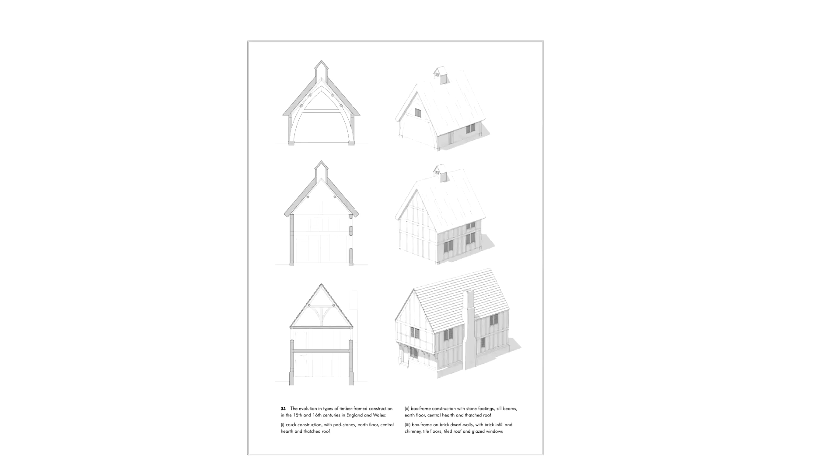And for that reason, in the vast majority of the cruck-framed houses that we have, the crucks sit on padstones. And there is virtually no archaeological evidence for earth-fast crucks because they've gone. What we do have are cases where the crucks have been scarfed and new feet put on them low down on padstones, and it is supposed that the padstones and the bottom of the crucks were pieced in. But that is the best I can say.

The first you see, I wanted it to be with earth-fast posts, and I received a criticism on the ground that there are actually no surviving examples of this. I thought, oh. So I put the padstones in.

But the main point is to show you an upgrading in the quality of timber-framed architecture from cruck framing, which is essentially a one-storied mode of construction with an earth floor and a central hearth, to a box frame, which, as you see, is raised on stone footings with a base plate and a roof plate, and again, an earth floor with a central hearth. So part of the house has to be open all the way to the roof.

And in the 16th century, the use of fired materials to upgrade box-framed construction, so that we have brick footings, a brick chimney stack. We no longer have a central hearth, so there can be a full first floor. We have clay tiles on the roof, and we have glass in the windows. And although the framing, the carpentry, is very largely the same, this is an enormous upgrading in the quality and the comfort of the house produced thereby.

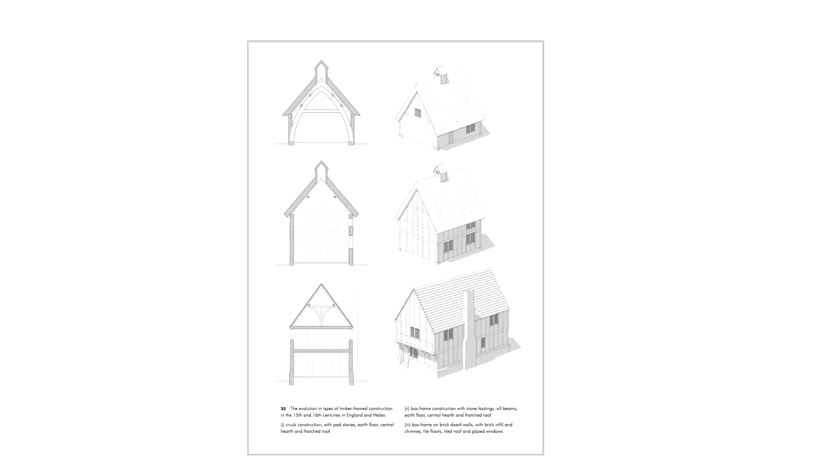Now, brick construction originated in this country only in the 13th century, and it was brought by Flemish craftspeople. And in the Netherlands, they had rather more sophisticated construction techniques because, of course, in a low-lying country, there's very little good building stone.

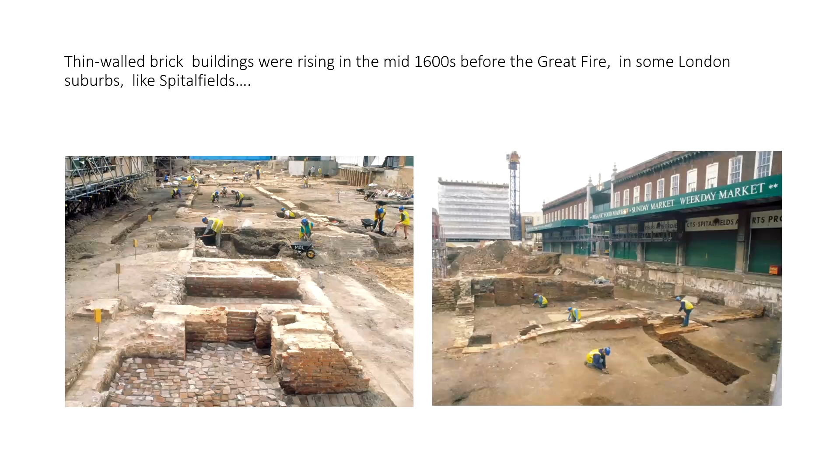And so London had established standards for thin-walled brick construction long before the Great Fire of London and the Building Acts which followed it. But the fact that the proclamations had to be reissued so many times, I think tells us a number of things. Most importantly, that it was quite difficult to get the Londoners to take much notice. And they paid attention when they wanted to. Of course, there are a number of factors at work here.

One is the greater resistance of brick to fire, and another was the rising cost of timber and the fact that most structural timber being used in London by this date was imported, was oak or increasingly deal from the Baltic. And as the cost of timber rose and the cost of brick went down, so framed building with brick infill declined in London and across the southeast in favour of thin-walled brick construction with concealed structural timber. And the London terrace house, you might say, is the result. And techniques for thin-walled brick urban houses and their structural carpentry were standardised well before 1700 through a mixture of craft practice in response, I think, to these official interventions.

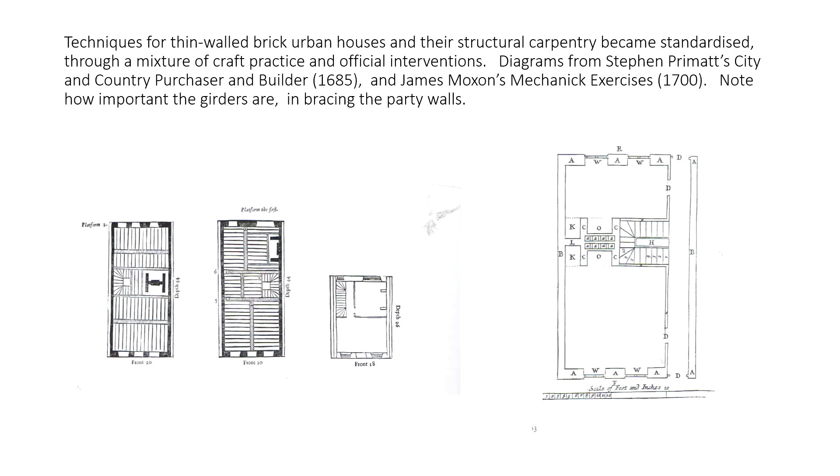And so the construction of urban terrace houses, the Barbon type of houses, was standardized, as we see in those books, well before 1700, and could be managed by a bricklayer or a carpenter. Typically it would be managed by a bricklayer or a carpenter as the lead contractor.

Quite a lot depended on whether craftsmen decided to make the stack internal to the house, but in the 18th century, it became increasingly common to locate the stacks on the party walls, and thus the entire internal structure of a Georgian terrace house is quite commonly made of timber, as many of you will know.

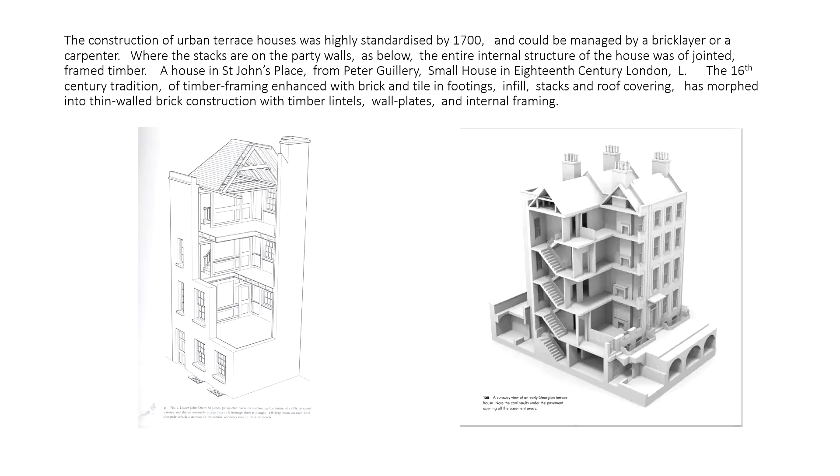So this is a house in St. John's Place from Peter Guillery's very wonderful book, The Small House in 18th Century London, which I owe a great deal to. And on the right is a cutaway of an 18th century terrace house made by Carlos Lemus for my book. Now, of course, framed construction didn't disappear, but it's hidden in one way or another.

And I think there'll be a whole range of answers to that question as the prestige and the fashionableness of classicism overwhelmed traditional framed construction and overwhelmed its distinctive but by then sadly old-fashioned aesthetic.

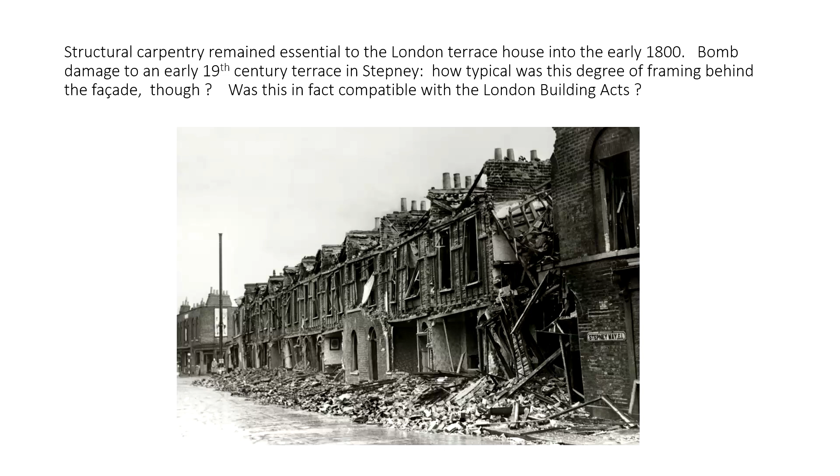So that's our first great theme, the evolution from traditional frame construction to thin wall brick construction with concealed structural timber, in which the carpenters are still right there at the heart of the building process, but their work is covered up by the brick.

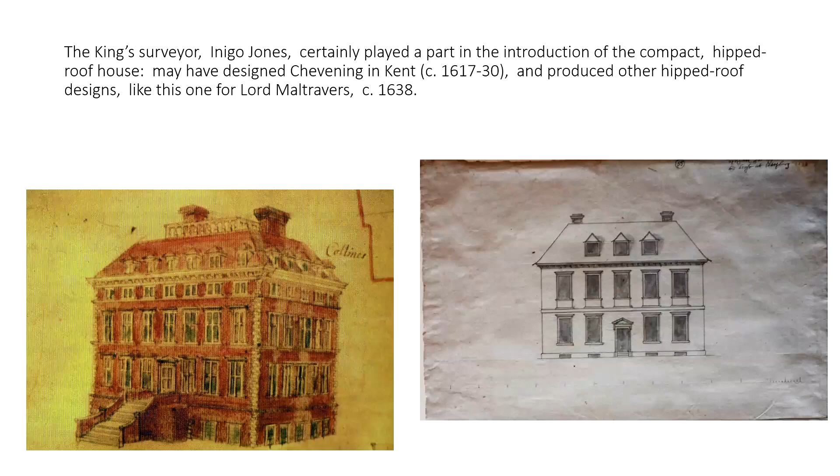And the last great decade for gable design, in particular shaped gables, was as late as the 1630s, as at Kew Palace and the very wonderful Broome Park in Kent. But thereafter, the tradition fell away very swiftly in the southeast and Midlands counties. I think the swiftness is slightly increased by the drop in the volume of building caused by the Civil War in the 1640s. So the gable and a variety in window design is still in sort of full flood in the 1630s. The Civil War kills a lot of new building projects, and by the time things start again in the 1650s, somehow the tradition has expired across all the more prosperous areas of England.

Now, a hipped roof looks deceptively simple from the outside, but they mask a range of types, as many of you will know.

It's easy to span a single pile building with a hipped roof because you don't need timbers that are really any longer than a traditional gabled roof. But for a double pile house, the shape of the frame gets more complicated, and I think you may need longer timbers in which to make it. And so the various different types of hipped roof evolved, at any rate certainly evolved in England during the 17th century. How far these borrowed from continental examples, I couldn't really say.

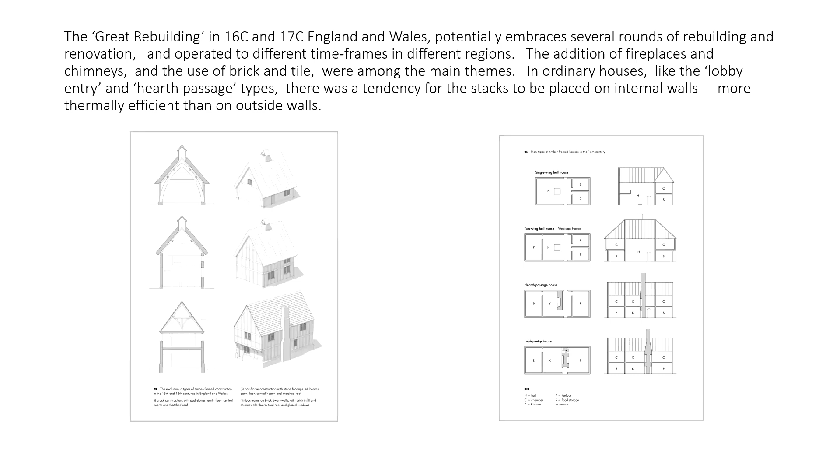But there were other reasons for locating chimney stacks on internal walls, of course. It allowed them to serve more hearths, far more thermally efficient. It provides a solid mass of masonry within the building. And this was very much tied up with the spread in the use of brick. And I don't think this particular change could have come about without the widespread use of brick, because stacks with multiple flues on several floors, if they're going to feed the same chimney, require complex shapes which would really be unfeasible in stone. Bricks, being small, uniform and heatproof, are ideal for forming these complex shapes which really would not be possible in stone.

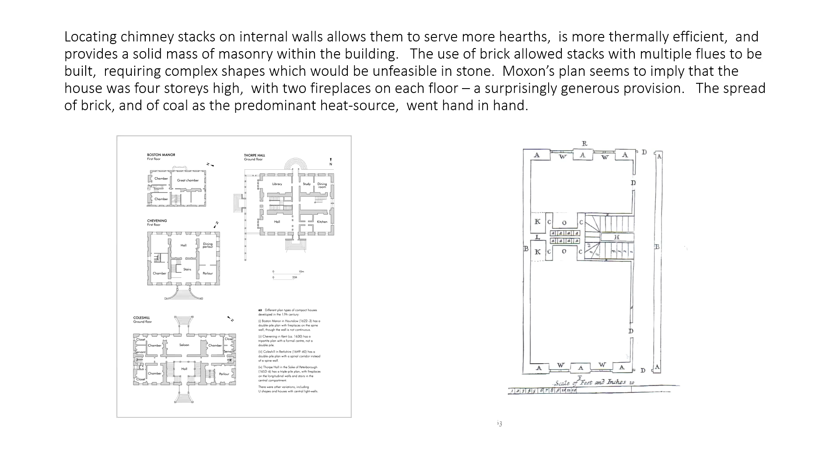And on the right, perhaps more revealingly, we have a plate from Moxon's Mechanic Exercises. And this is really fascinating when you start to think about the implications of the stack that he's showing here. Look how generous his provision is. 8 flues shown there. So the implication is that it's a 4-story house with 2 hearths on each floor, a surprisingly generous provision, and a very elaborate structure which would obviously only be feasible in brick. And so Moxon is setting out how to do this in some detail.

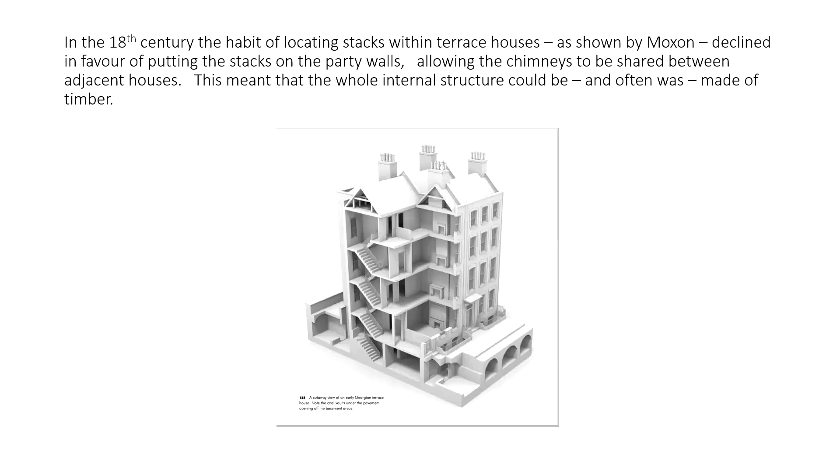By the 18th century, the habit of locating stacks within terrace houses declined, as we've seen, in favour of putting them on the party walls, which allowed chimneys to be shared between houses. And this, of course, meant that the whole internal structure could be, and often was, made of timber. So the change from timber to coal as the primary source of heating, and the multiplication in the number of hearths per house was one of the fundamental factors driving the transformation of architecture in the 17th century.

The decline of timber and the rise in coal as the primary heating source, especially in towns and cities, is a really fundamental factor here, because, of course, coal is a lot denser and heavier than wood. There's about 4 times as much stored calorific value by mass in coal as there is in wood, which means you get more heat from a smaller fire. But it also means that to burn efficiently, the fire has to be contained. You have to allow for a draft under it, so it has to have a grate, a well-formed fireplace and a well-shaped, fairly narrow flue to draw the smoke up efficiently, because, of course, coal fires produce sulfur dioxide, visible thick black toxic fumes, which wood fires do not.

Of course, both wood and coal fires produce carbon monoxide, which is potentially lethal, but that wasn't known in the 17th century because it's colourless and odourless. And I think we have to assume that in early times, the high interiors and the ventilation associated with central hearths tended to disperse the carbon monoxide. Well, venting a coal fire became a much more urgent priority, and so flue design and stack design became a much more urgent priority for builders, with the implications for domestic architecture that we have just seen. And as you will note, not one architect's name has come up here. This is something which was developed, negotiated by craftsmen and their clients between themselves over the course of the 17th century.

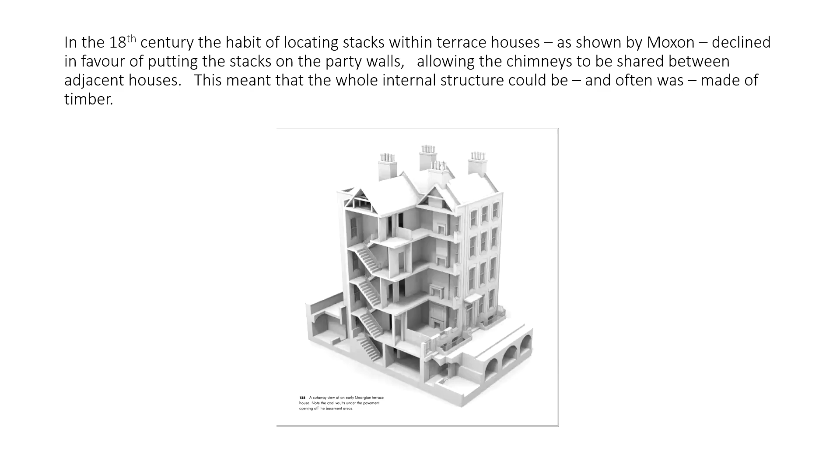As you probably know, Charles II's government enacted a very unpopular hearth tax in around 1662, and there were hearth tax returns until it was repealed in the 1690s, and they'd been published for many English counties, and they show how the number of hearths per house proliferated down the social scale by the late 17th century, and even common labourers might expect to have a house with 2 hearths in it, and farmers would have houses with 3 or 4 hearths, and great houses, of course, might have 40 hearths.

So English houses were better heated and more rooms were individually heated, with implications for privacy and the way in which houses were used never before. But one rather ironic point about this is that as coal fire heating became ubiquitous, and as houses grew more and more fireplaces and chimneys, they receded as external design. The rules of classicism offered a few clues as to how to deal with them, and generally in front of a Palladian mansion like Hagley Hall or walking down a Georgian street, you very often hardly notice them at all.

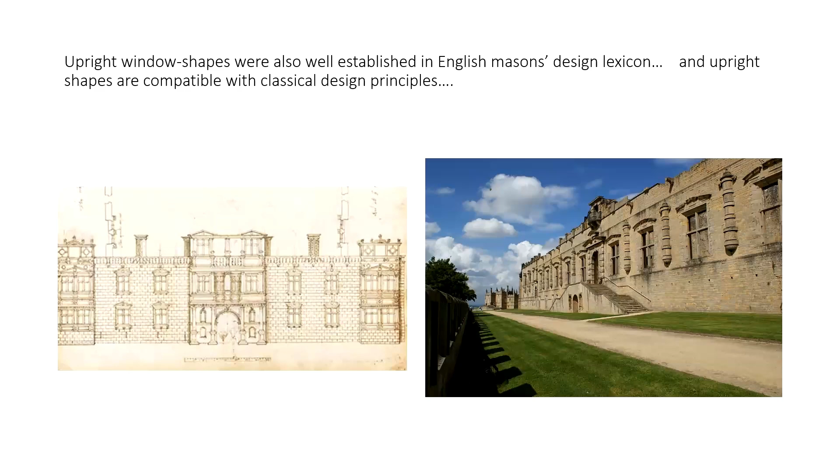And here, the name which comes into the offing again is that of Inigo Jones, who travels to Italy with the Earl and Countess of Arundel in 1612. And it may well have been him who designed the Italian window at Arundel House, which was later drawn by John Smithson. And you can see John's drawing of it here. He was so fascinated that he made little opening paper flaps to represent the shutters. And he drew its plan very carefully to show its construction.

And as you can see, it has an external crossbar frame, which will be fixed, and it has quite heavily framed opening lights. There's a light which is going to open inwards first, and the shutters are framed into the opening lights. And John's obviously fascinated by this, and he calls this an Italian window very significantly.

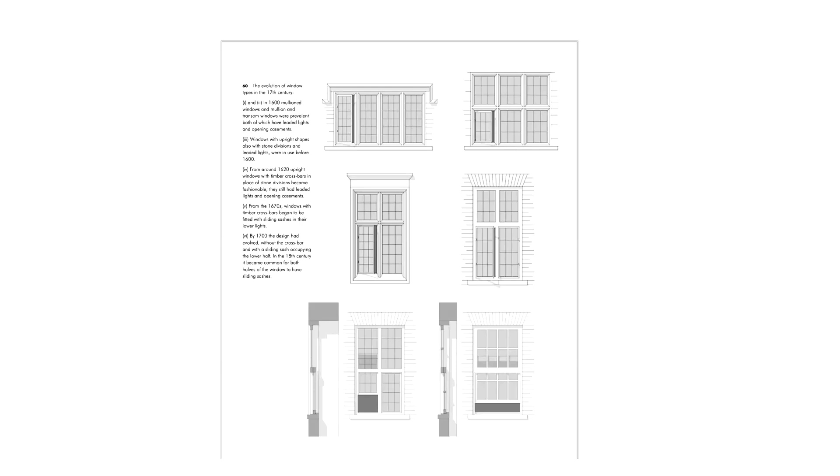make the sliding sash the whole width of the window, and that was happening in the 1680s and 90s. It's happening at Chatsworth, happening at Hampton Court, and it spread down the social scale and was picked up by the carpenters and joiners in the towns remarkably quickly, and crossbar glazing was displaced very fast. So there is a fairly clear evolution in window design, where I think one should allow the architects a little more influence, but still this is something which is being negotiated between craftspeople and their clients.

I've already talked a bit. One of the peculiarities of this subject is I've already introduced several of the themes here more than once, so I can speed up a bit, which is just as well.

I've talked about the way in which in medieval culture and in Tudor building culture, most buildings were formed of ranges 1 room deep. And here are 3 Tudor courtyard houses which illustrate this point: Cotehele and Compton Wynyates. At Compton Wynyates, the bit at the top, which is shaded slightly darker, is a 19th century addition, and it was built as ranges 1 room deep, just like Cotehele and Cowdray House.

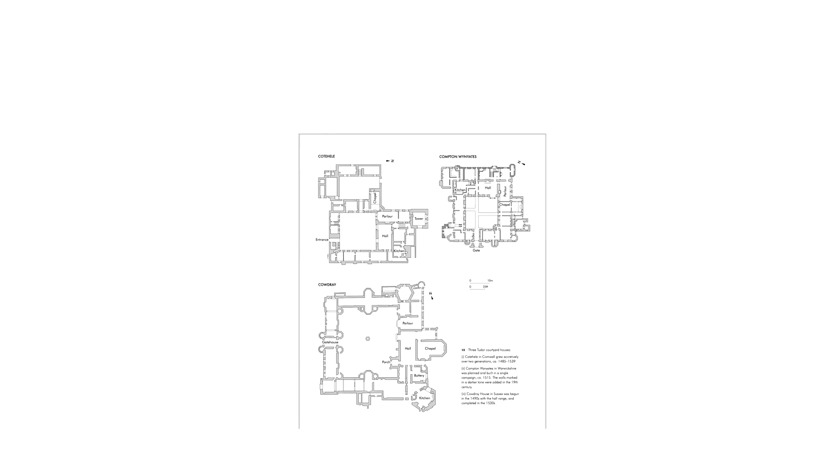And the hierarchy is in terms of where you are in the ranges of the building. So there's a high end of the hall and a low end of the hall, and the lord and lady are at the high end, and the kitchen servants at the low end, and the chaplain has a chamber somewhere near the chapel. And it's arranged in a sort of topographical way like that.

But once you move to a compact mode of organization, it has to go out of the window and come back in by the basement door, because in a house like Coleshill, the servants, from having their place in the ranges to either side of the gatehouse, are banished. They no longer dine in the hall, they no longer sleep in the hall. My goodness me, no. The hall, from being the common space for the house, is now a grand entrance hall for Sir George Pratt and his posh visitors. And the servants work in the basement and sleep in the attic.

So another major aspect in the development and spread of compact planning is that it pushes the plan towards a sort of vertical hierarchy, a vertical segregation towards the servants being in the basement and the attic, just as they would be in a London terrace house.

And I would suggest that all the thermal efficiency, cheapness of building, principles of design, getting the servants out of sight either downstairs or upstairs, these factors all come together in a very complex process, which is working in clients' minds as much as in the craftsmen's minds. No dirty servants toing and froing from the hall.

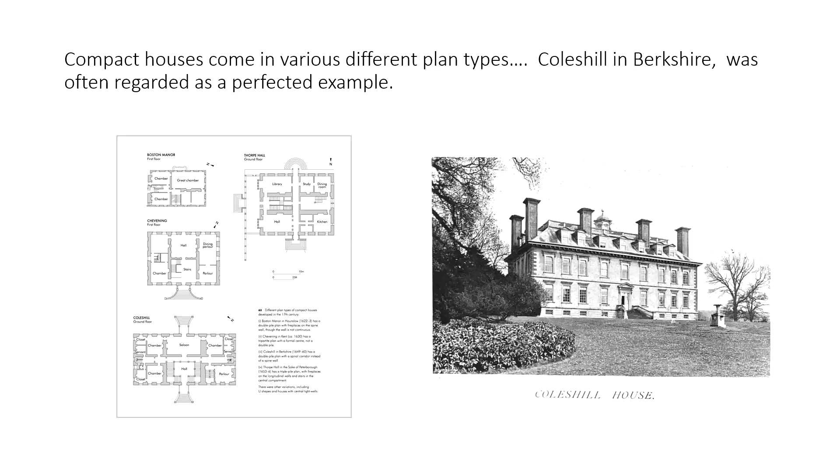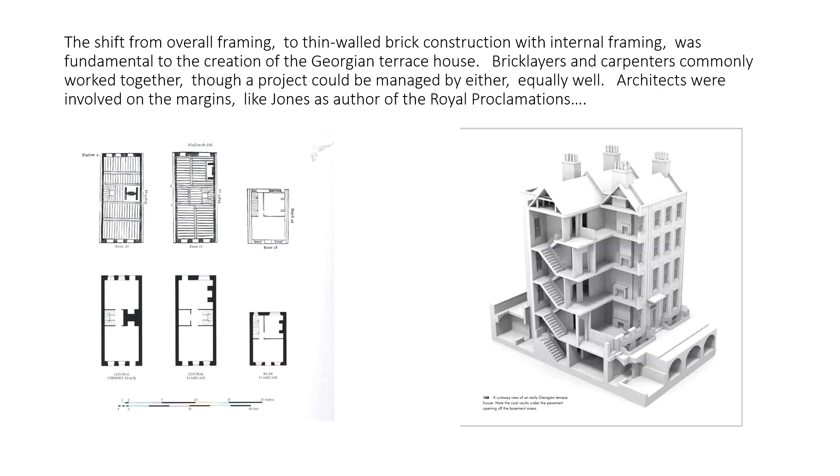Architects were involved in the margins here, like notably Inigo Jones as authors of the various royal proclamations, but my strong feeling is that although successive London building acts helped shape the class of terrace houses, helped to shape their appearance, construction standards and design, they were moulding something that was already coming into existence in the everyday flow of building culture. And if they'd specified anything which was too alien to that culture, they would just have been ignored. And so we get the gamut of London terrace houses.